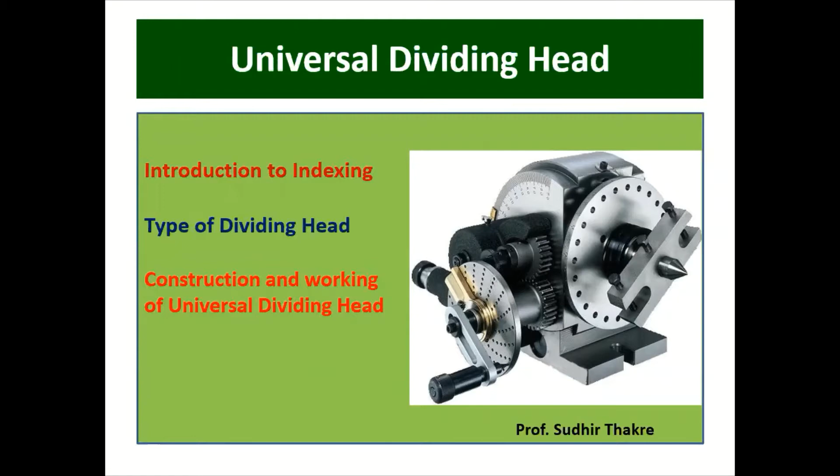So what is indexing? Indexing is a process of dividing the periphery of workpiece into any number of equal parts. Here one blank I have taken, that is nothing but a workpiece, and that workpiece has to be divided into the number of parts. Just by using the protractor, it's very easy to divide any sketch at different angles. But on the machine, it is a very difficult task.

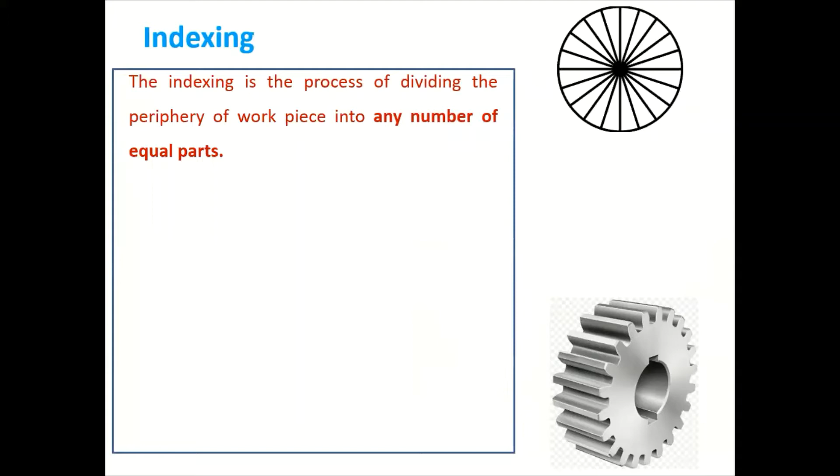So for that, we are using mostly the universal dividing head. This is the blank I have shown, and now let's take one example. Suppose you have to cut 20 number of teeth over that blank. So 360 divided by 20 is equal to 18 degree, meaning the angle between the two teeth is equal to 18. So after each tooth is generated, it rotates the job through a desired angle. In that case, we are indexing to 18 degree, and thus the indexing of the workpiece is possible by using any dividing head.

If you want to go to the exact angle or even in the fraction, it may be 18.5 degree or 19.5 degree, any type of angle can be divided by using a dividing head, or the indexing head.

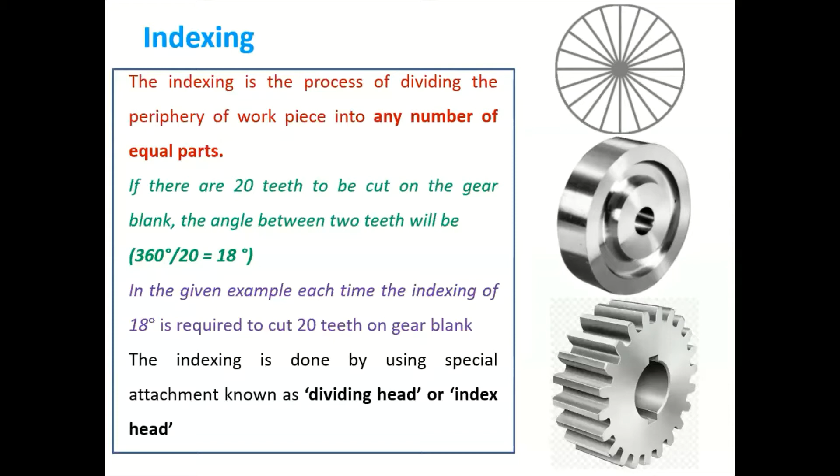So indexing is done by using a special attachment which is known as a dividing head. This is the sketch of the universal dividing head. A dividing head is a device that is mounted as an attachment on the table of the milling machine. You can see this sketch, mounted on the table of the milling machine, and we can hold a component between these two centers.

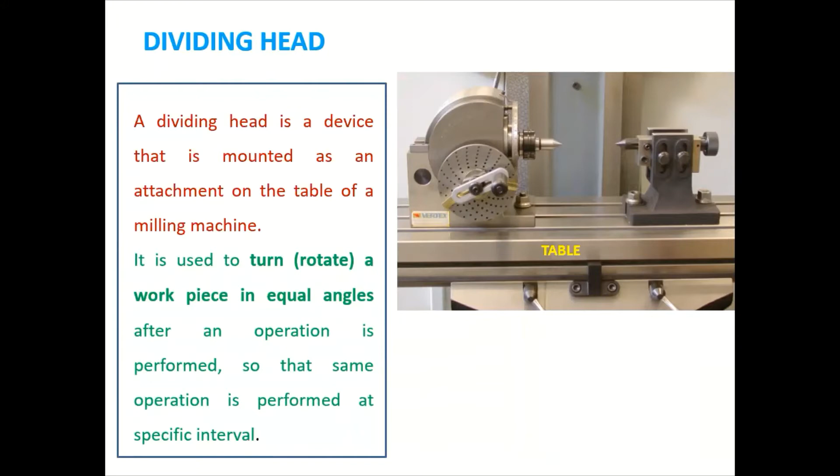It is used to turn a workpiece in equal angles after an operation is performed, so that the same operation is performed at specific intervals. As we are holding the workpiece between these centers, when you give the indexing movement to the index crank, the workpiece will also rotate. So after each tooth you have to rotate to a certain angle, and for that the dividing head plays a very important role.

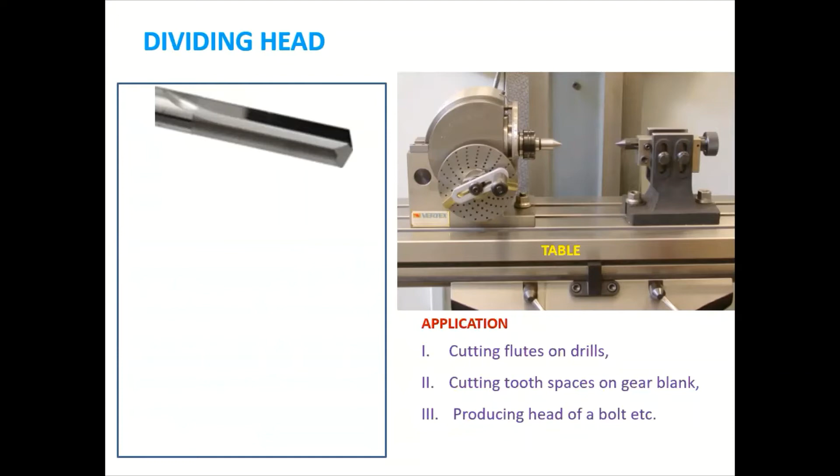Application of the dividing head: if you want to generate flutes on any bar, it is very easily generated by using the dividing head. You can see the number of flutes we can generate there. This is an example of the application of the dividing head, so we can divide the blank into a number of equal teeth or equal parts.

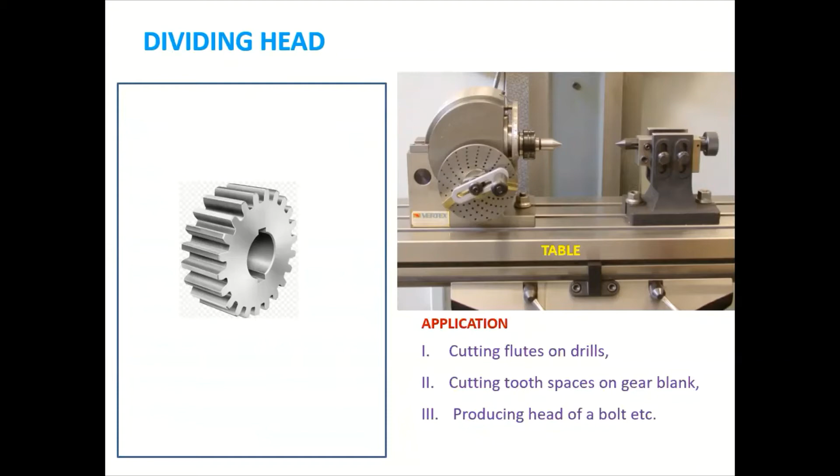Then the next example is the head of a bolt. Suppose we have taken a bolt, and on that we want a head of 4-sided, 6-sided or 8-sided shape, which is very easily divided by using the dividing head.

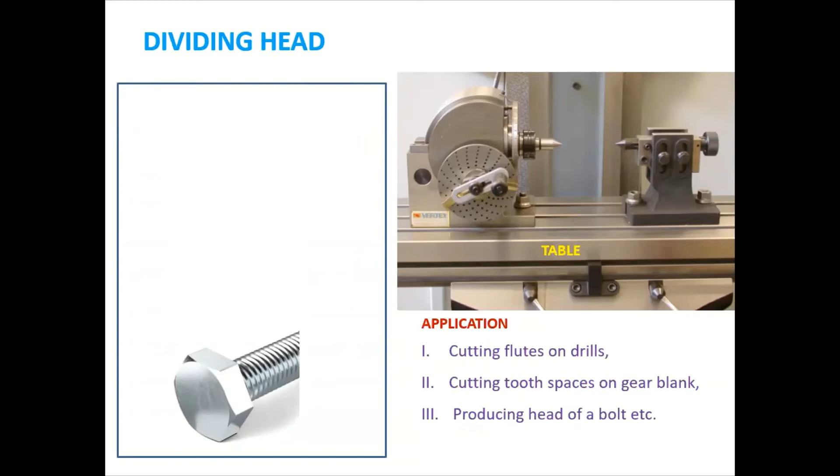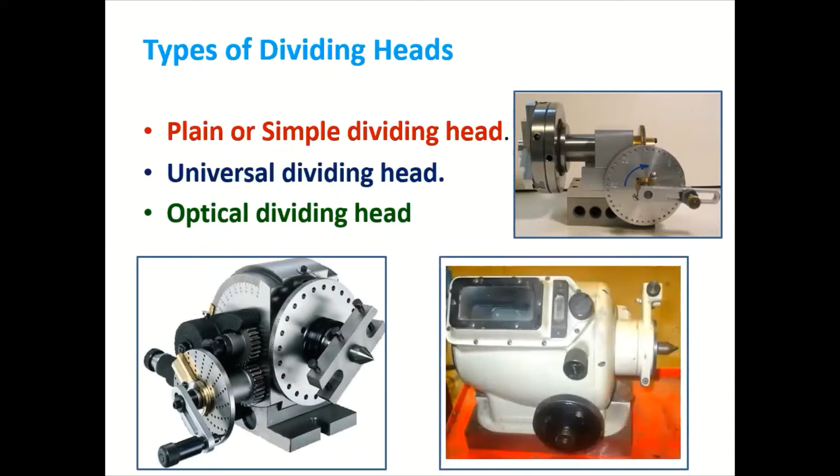Types of dividing head: plain or simple dividing head, universal dividing head, and the optical type of dividing head. But in today's lecture, we'll go more in detail on the universal dividing head.

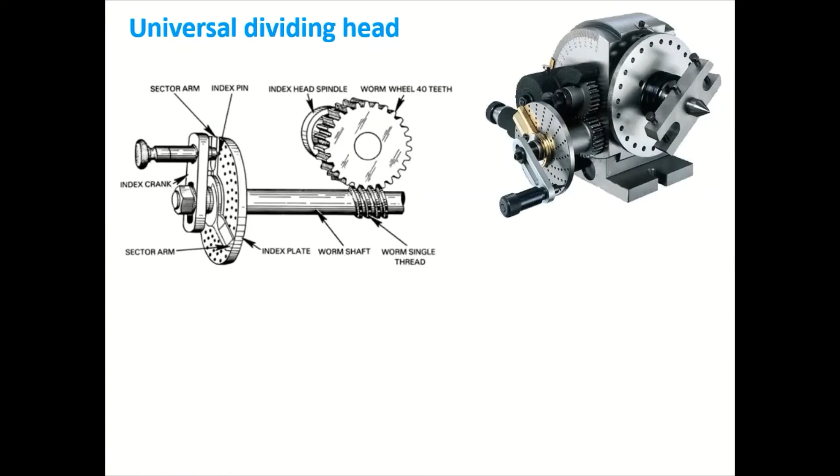So first is the worm and worm wheel. We can see very clearly that there is a worm wheel, and this worm wheel is mounted over the hollow shaft or hollow spindle. From the diagram it is very clear. The worm wheel consists of 40 number of teeth, which is standard for every dividing head, and it meshes with the worm with a single thread. You can see in this case the worm wheel meshing with the worm.

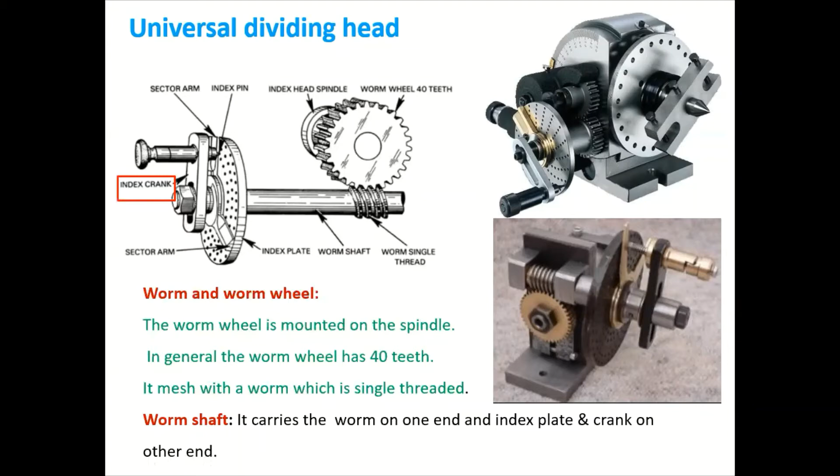So when we talk about the worm, on the shaft we are producing helical threads, right, you can see in this diagram also. This is a single worm having a single thread with single start. It's having helical threads on that shaft, and that's why that shaft is called a worm shaft. The worm shaft carries a worm on one end, and on the other end there is an index plate and the index crank, meaning on the other end we are mounting the index plate and the index crank.

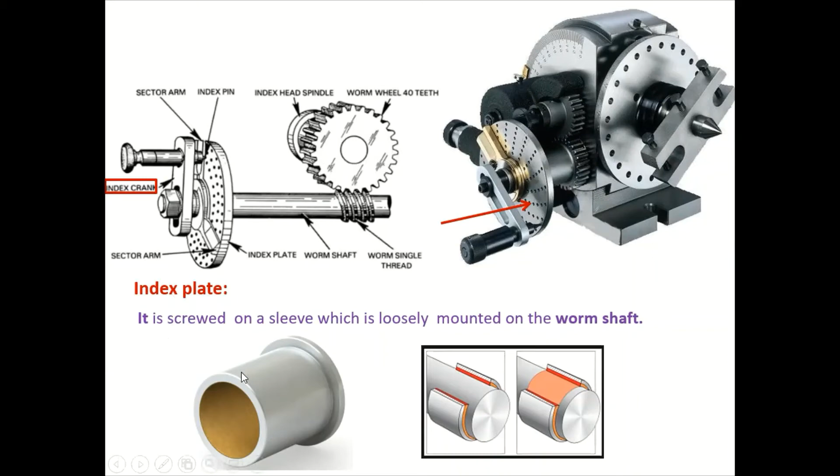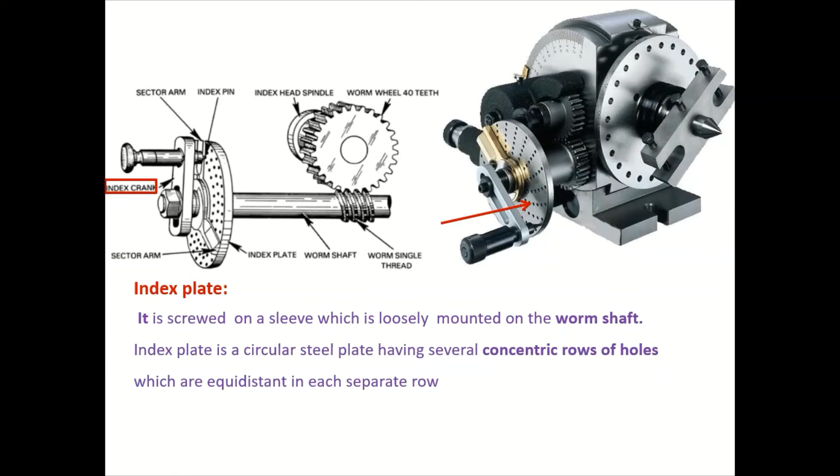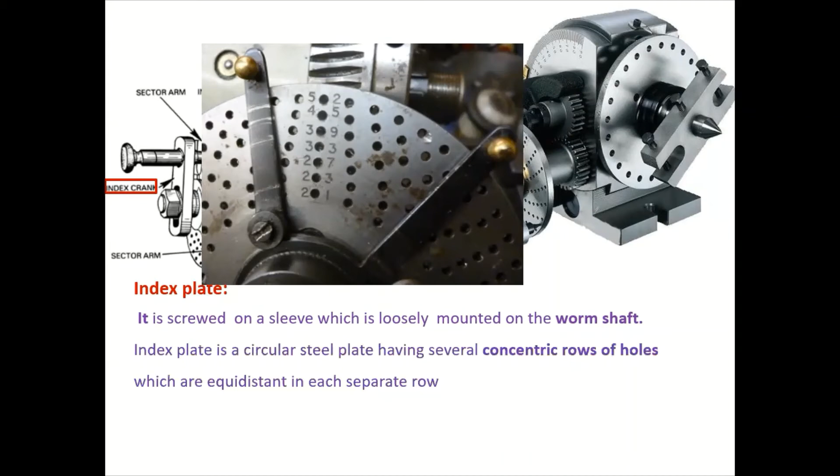This index plate consists of a number of concentric holes on its surface, which are equidistant. I'll show you this. You can see the number of holes here. Suppose this outer hole row has 52 holes, then there are 45 holes, 39, 33, 27 holes, and so on in concentric rows. These can be utilized for dividing the workpiece into a number of angles as per the requirement, so for that we need a calculation.

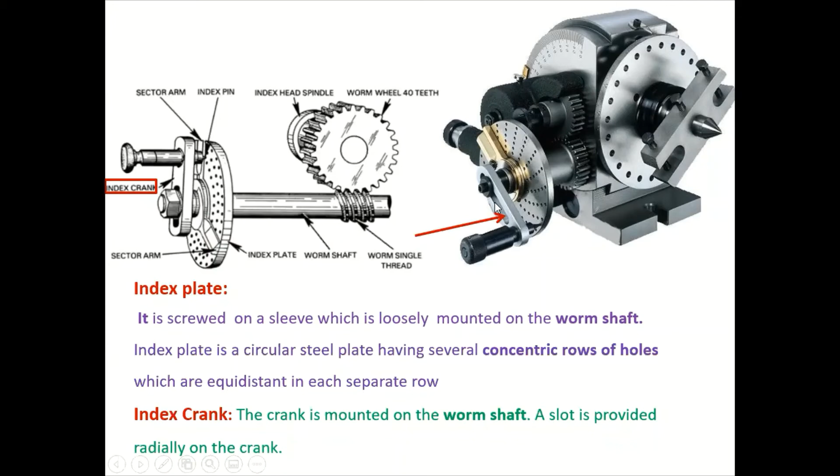Then the index crank. You can see in your diagram there is an index crank. This is the index crank, and it is mounted over the worm shaft, as shown here as well. This index crank is provided with a slot.

Then the index pin. You can see in this diagram the index pin is mounted over the index crank. This index pin is generally a spring loaded pin, so that we can insert it into the hole of the plate. When selecting holes, as shown previously, there are a number of concentric holes, and as per the calculation we have to select the appropriate row, say 27 holes, and insert the pin there. For that we need adjustment, so the slot is provided, allowing me to adjust the position of the spring loaded pin so it can enter into the particular hole circle.

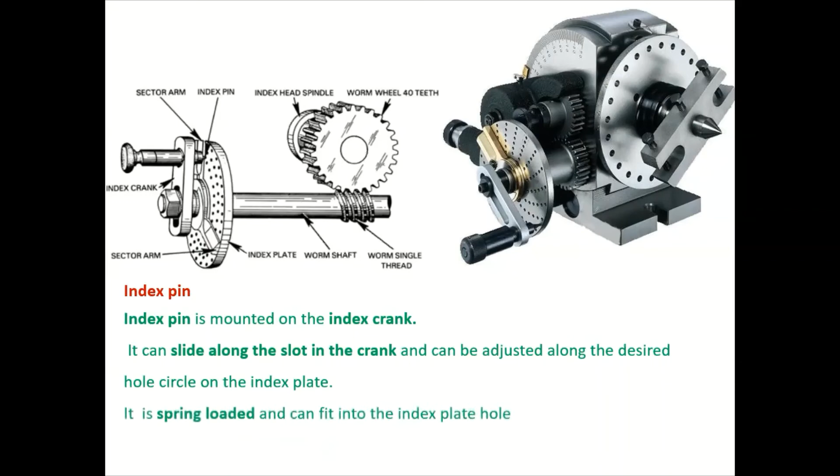This is what I'm showing, that slot. And this is the pin which is spring loaded. That index pin is a spring loaded pin.

Then the spindle. You can see in this diagram the spindle is provided with a job carrier and a center at its front end to hold the workpiece. We can hold the workpiece between the centers, or there is a job carrier so I can hold the workpiece properly. Both options are available.

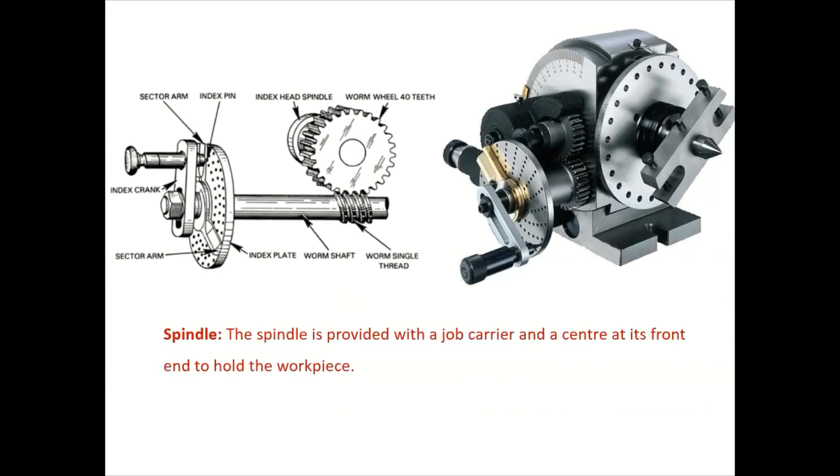Then the other part is the sector arm. What is the importance of the sector arm? Since there are a number of holes on the plate, as I'll show on the diagram, this is the index plate, and these are the sector arms. When you are selecting, say, the 27 hole row, the position you are selecting is very difficult and confusing to track. So the sector arm is used. Suppose I'm starting from this position, I'll place the sector arm at that position so I can eliminate counting holes on the index plate, otherwise there's a possibility of mistakes. That is the purpose of the sector arm.

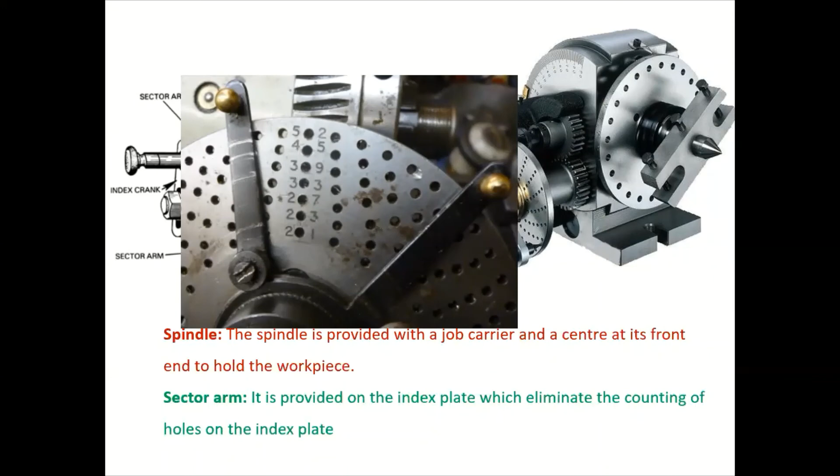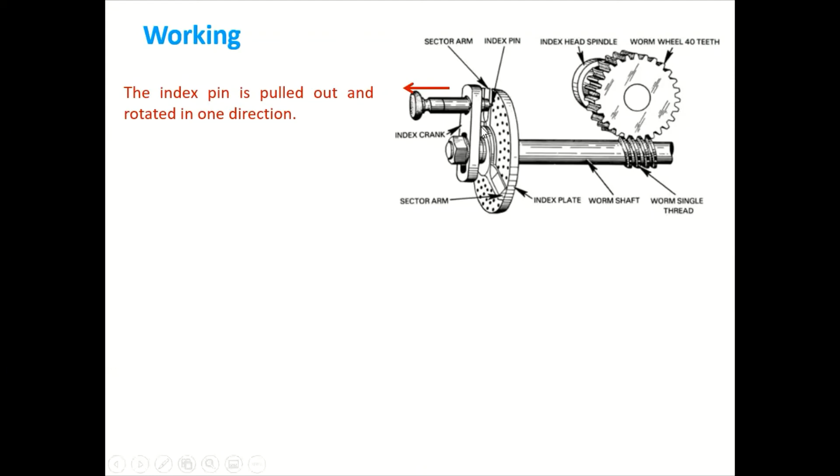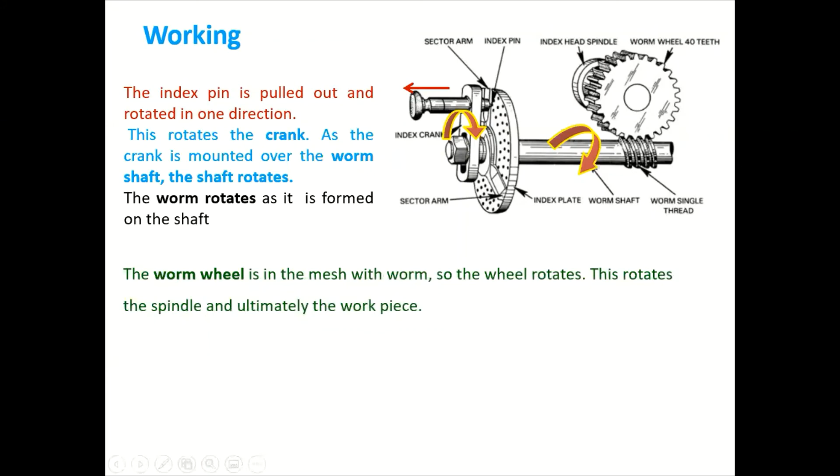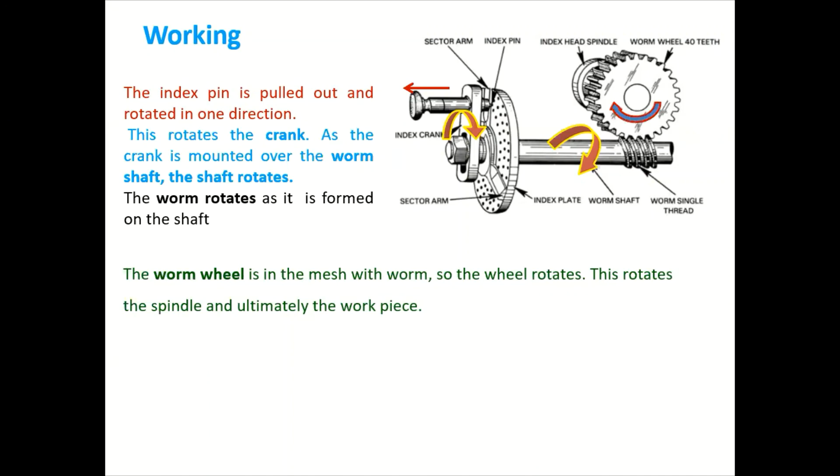Now the working is very simple. First, you have to pull the index pin, which is mounted over the index crank. As we rotate the index pin, the index crank will try to rotate, and this index crank is mounted over the worm shaft, so the worm shaft will also rotate. This worm shaft carries a worm having a single thread, so that will also rotate. The worm wheel and worm are meshed with each other, so as the worm shaft rotates, the worm wheel will also rotate. This means the rotary motion of the worm shaft is converted into the rotary motion of the worm wheel.

Now, whenever we use the worm and the plate, when the crank is rotated, this worm wheel has 40 teeth. So when the crank is rotated by 40 turns, the main spindle and the work will rotate through 1 turn, meaning it covers 360 degrees.

But how many turns do I have to give? I have to give 40 turns to the index crank for the workpiece to rotate. The work is mounted in front, and to rotate the crank through a fraction of a turn, the index plate is provided, because many times the angle may be a fractional number like 18.5 or 19.5 degrees. So it's very easy to divide the gear blank into n number of equal parts using the index plate. So thank you, friends.